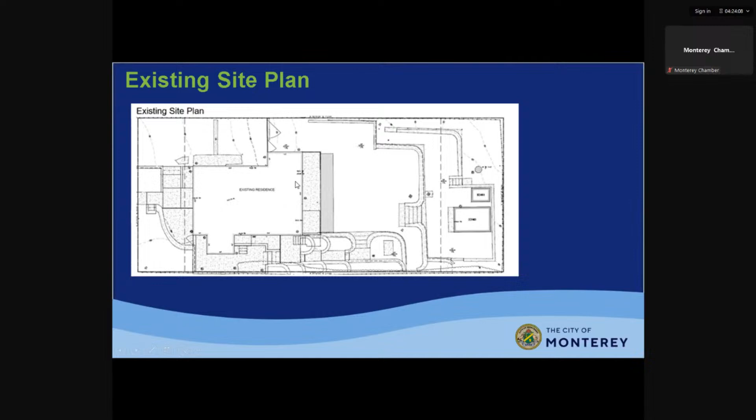The proposed project is a 534 square foot addition, a 267 square foot first floor addition, and a 267 square foot second floor addition. Replacement and relocation of a 289 square foot second story balcony and stairs. Expansion of the rooftop deck from 49 square feet to 200 square feet. A new chimney, new exterior finishes, and a new first and second story.

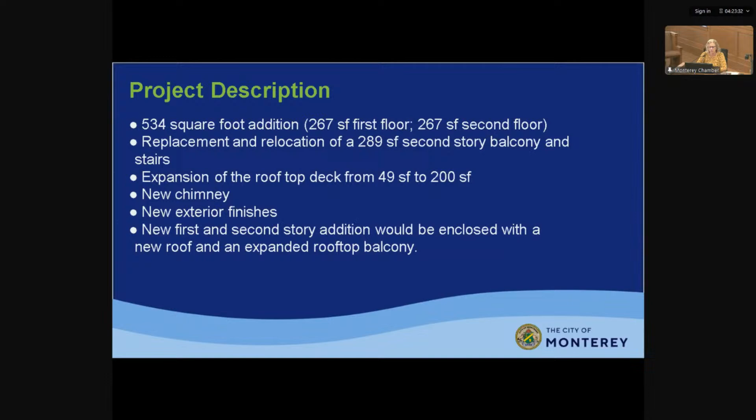The first and second story addition will be enclosed with a partial new roof, and the rest of it would be an expanded rooftop balcony. The project also includes the retroactive approval of horizontal siding.

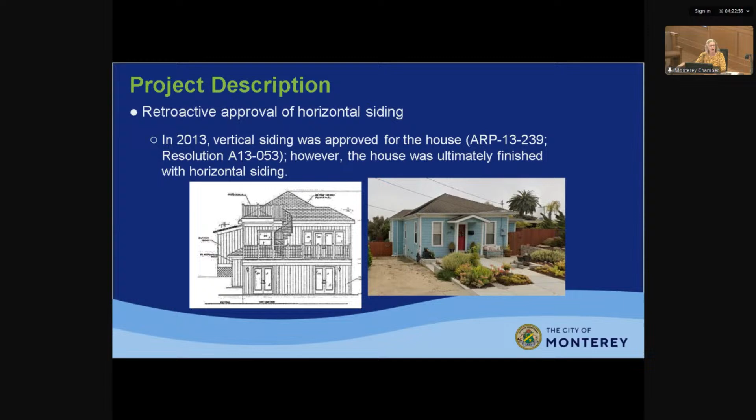So the last architectural review approval included vertical siding, and then I see that the residence has horizontal siding on it. When I visited the site, I couldn't track how that approval was made between the architectural review and how it was constructed with the horizontal siding. So this application includes that retroactive approval of the horizontal siding. The addition would be finished in horizontal siding.

Here's the proposed site plan showing the main and lower floor addition at the rear of the residence. So it'd be a first and second story addition, so there is no second story addition on top of an existing second story - it's all new. And then the expansion of the deck here that you see in the crosshatch, and stairs here.

And then there is an upper story deck, which I think it helps to see the rooftop or the roof plan, but it's going to be on top of this addition.

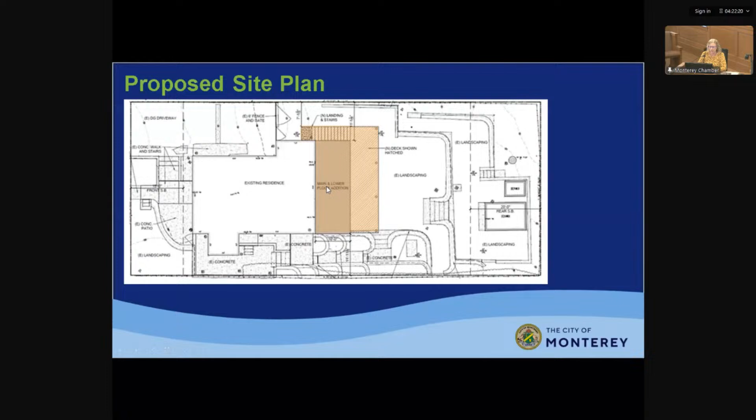So here is showing the rear elevation, the north elevation, existing and proposed. The rooftop deck is going to be expanded, as you can see on the proposed. The spiral staircase, the existing one, is just getting moved over from toward the center to the left side. New railing from wood to metal. I'll show you that as we move along.

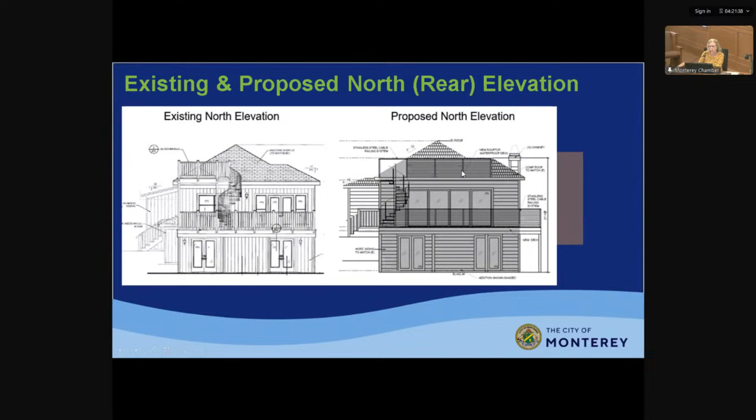The new addition will get a partial roof over here, and the rest of it will be the railing and the rooftop deck. There'll be a weatherproof finish on top.

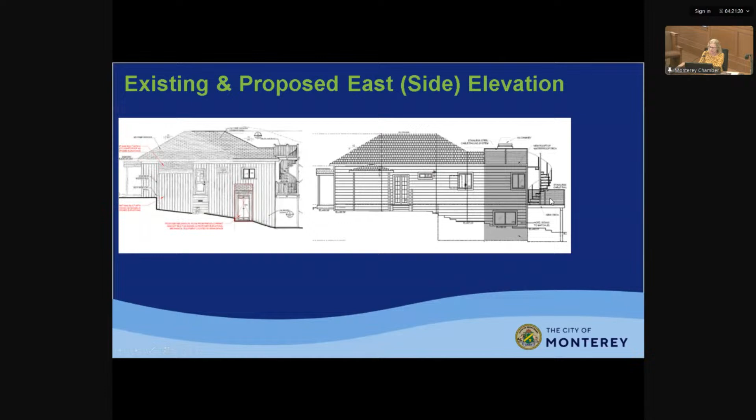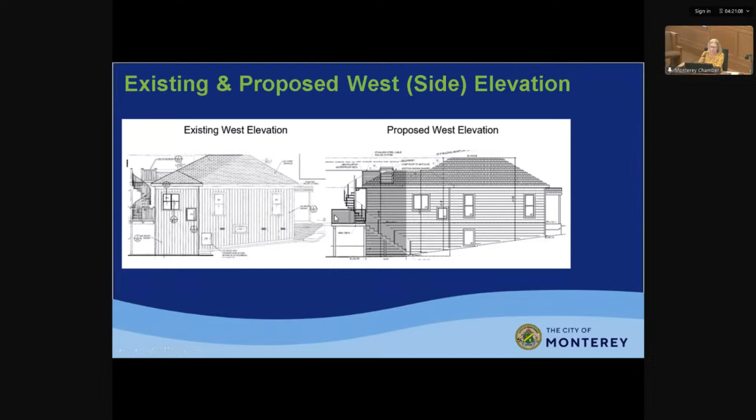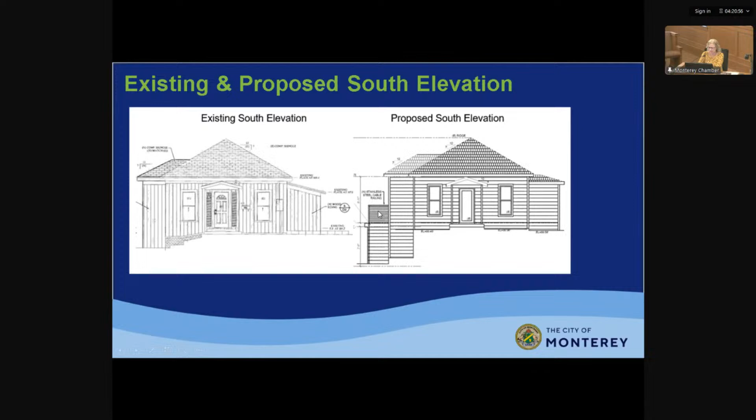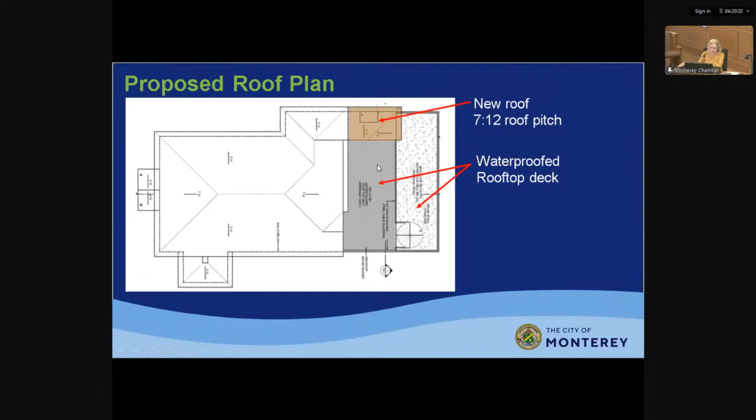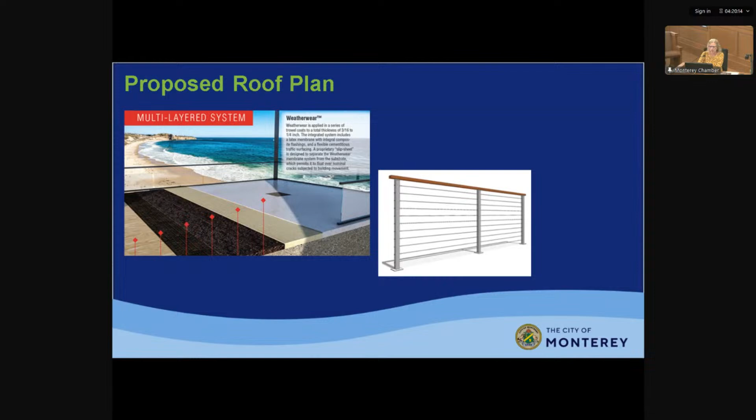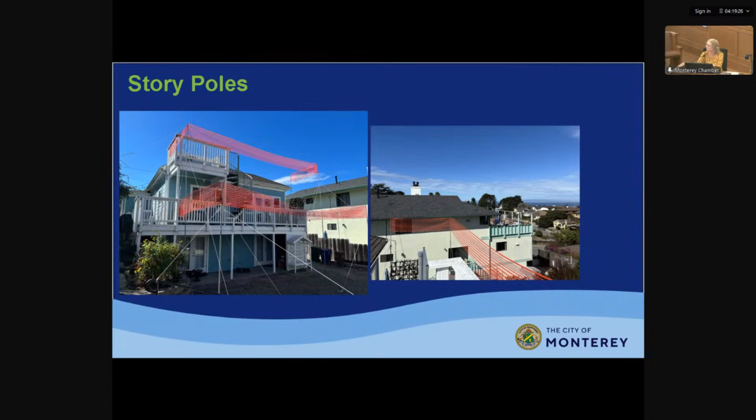The story poles were up 10 days, at least 10 days prior to the hearing, and more than that actually. Notices to neighbors within 100 feet. We didn't receive any letters, so I don't think there's any concerns about privacy here. I did stand on that rooftop deck, and I don't see that there would be any impacts to views.

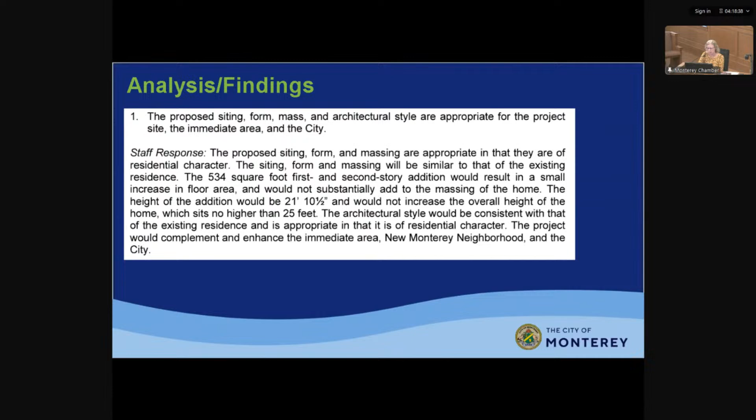So I'm going to go through the findings here. Finding 1: the proposed siting, form, mass, and architectural style are appropriate and of residential character. The siting, form and massing will be similar to that of the existing residence. The addition is somewhat small, 534 square feet, a first and second story addition, and would not substantially add to the massing of the home. The height of the addition would be approximately 21 feet, 10.5 inches, and would not increase the overall height of the home, which sits no higher than 25 feet. The architectural style would be consistent with that of the existing residence and would complement the neighborhood and surrounding area.

Finding 2: the proposed project will not unreasonably impair the views, privacy, or living environment currently enjoyed by properties in the vicinity. The addition would be located at the rear of the existing residence. So going through the west elevation, which faces the residence at 899 Pine Street, there's no new windows.

And there are windows located on the opposite side. Like I said, formerly a child care center, but now it might be a residence. But I didn't receive any letters of concern when we sent out the notices, and the story poles have been up. In addition to the rooftop deck, no one has brought forth any concerns of privacy.

And the bay views would not be impacted since the project would not involve an increase in height. Currently this house sits approximately 25 feet, and this would be just over 21 feet in height. So there should be no impact on bay views from adjacent properties or those sitting higher in elevation.

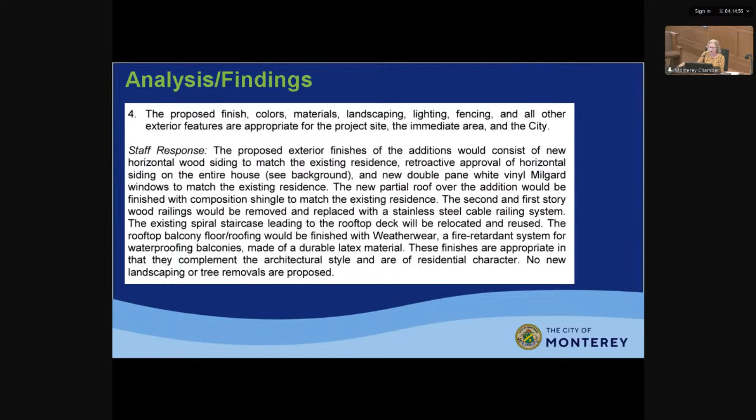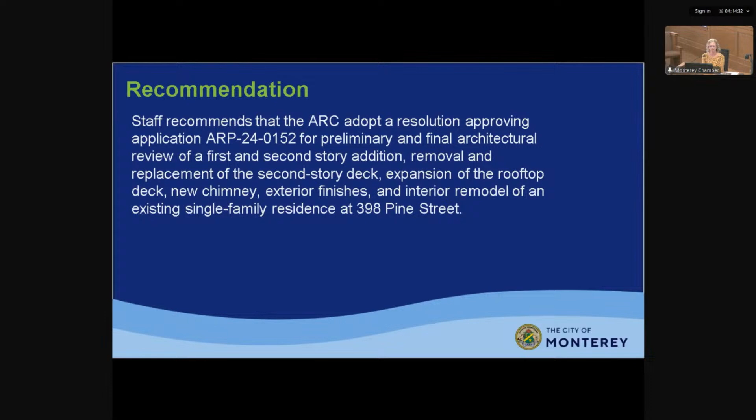Does anybody on the committee have any questions of staff? Seeing no questions, would the applicant like to make a presentation?

Good evening, members. My name is John Moore. I'm the applicant on the project. I think she did a great job, thank you for presenting the project. Our main goal in this was just to get them a little bit more room. They already had a rooftop deck, and then also maintain the privacy of the neighbors.

So that's why on the left side, facing the big three-story house, we did continue out the hip roof instead of just wrapping the cable railing around. That way, when people are sitting up top, they're not going to be looking at the neighbors, and the neighbors aren't going to be looking at them.

On the right side of the house, looking at it, there's probably a 12 or 14-foot big hedge where we do have one window in our kitchen area, and you can't even see the house on that side. So I think we've maintained the privacy from the neighbors in a complimentary way and got them a little more space that they desired. If you guys have any questions, I'm available.

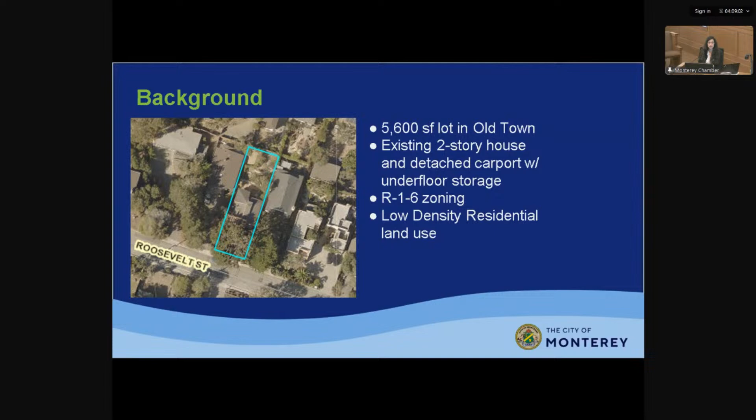The carport structure that is currently there is non-conforming in that it has a setback that is less than the required 20-foot front yard setback. The setback currently is 6 feet 5.5 inches, and the side setback required is 5 feet, but it's only 4 feet from the east side property line. And the height of accessory structures in the R1 district is 12 feet, but the carport's height is 16.9 feet.

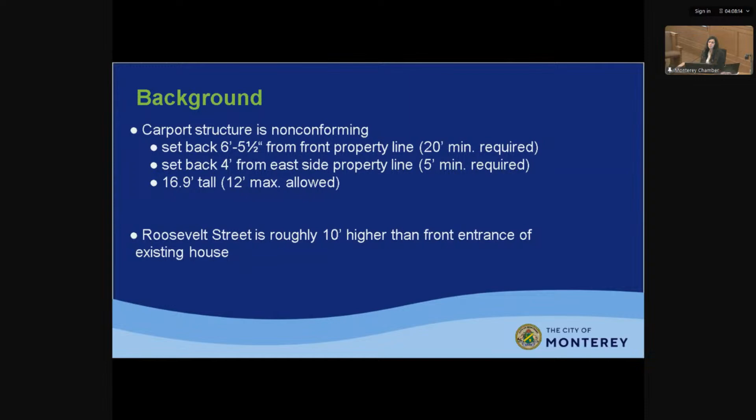I should point out that Roosevelt Street is roughly 10 feet higher than the front entrance of the existing house. If you look at this survey, the elevation on Roosevelt Street that was taken is at 258 feet above sea level, I assume. And then the elevation at the house, where these wood steps are the front of the house, is 248.29 feet. So that's a roughly 10-foot difference, and the site slopes considerably downhill toward the house.

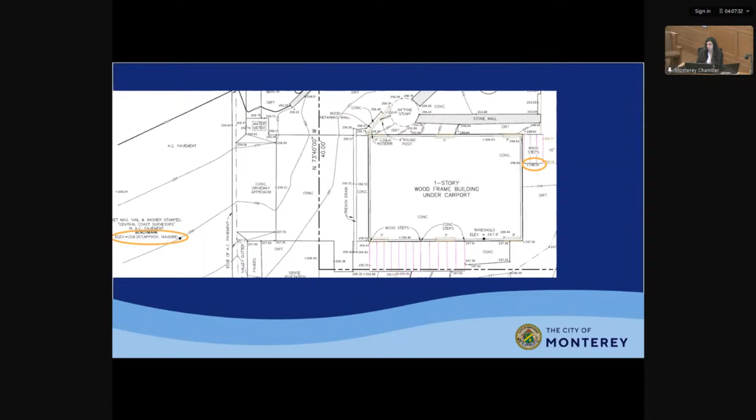The applicant applied for a variance to accommodate a new garage in the place of the carport. These are the requests that they made. The front setback would stay the same. The variance was approved for the front of the garage to be at the same distance as the current carport is to the front property line.

The east side setback existing condition is 4 feet. The requirement is 5, but the planning commission approved a 4-foot setback, the same as the existing carport. The building separation existing condition is that the carport is 11 feet, 5.5 inches away from the house. The requirement is 10 feet, but the planning commission approved a 7-foot, 4-inch building separation from the proposed garage to the existing house. The height existing condition is 16.9 feet. The requirement is 12, but the planning commission approved the variance of 23 feet, 11.5 inches as the maximum height for the proposed garage.

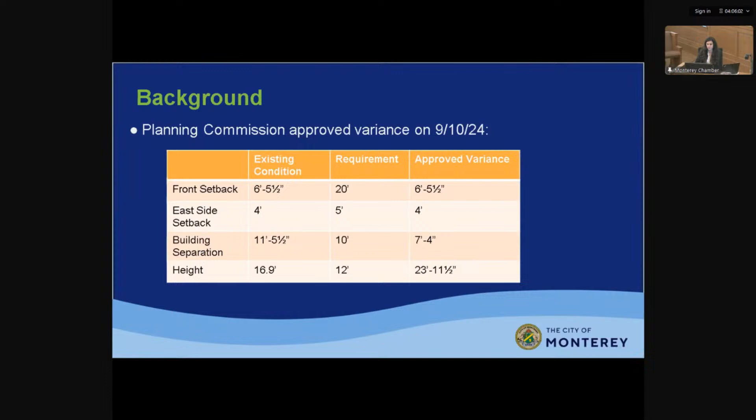This is to show the existing versus proposed site plan that the applicant submitted. You can see here on the left is the existing carport. The front setback is 6 feet, 5.5 inches. The separation to the house is 11 feet, 5.5 inches. And the 4-foot setback to the east side is right here.

The proposal is to keep that same front setback, keep the same side setback, get closer to the house, and to remove a tree. It's an 8-inch oak tree, which would be very close to the new 2-car garage.

This is the oak tree. It's growing out of, very close to an existing retaining wall, and it probably has its roots compromised already.

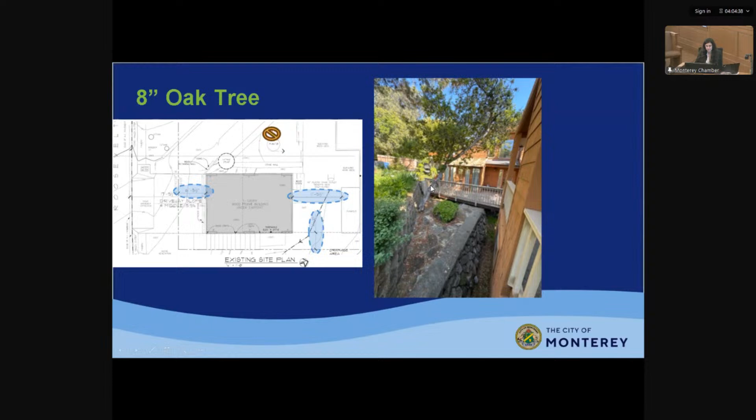And the other tree, let me show you. It's not shown here, but there was another tree that the applicant was proposing to remove, further west, so it's not shown here. But that tree was not a part of this development application. The city forester approved its removal because the tree was in declining health. It was an 18-inch pine tree, and the forester required a replacement tree, a 5-gallon replacement tree anywhere on site.

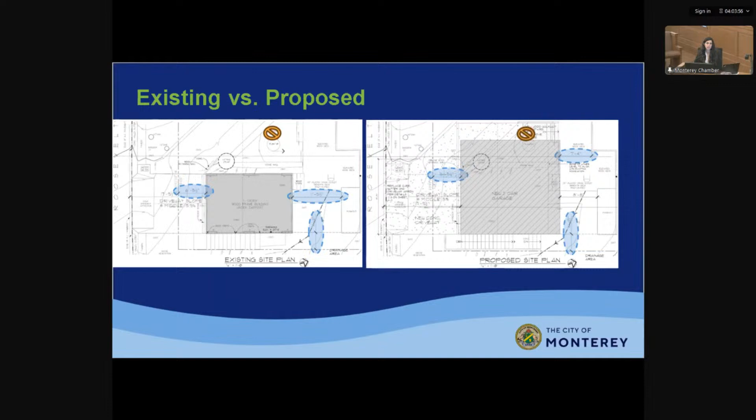This is the view east and west. This is existing, the carport again, and then the underfloor storage area. You can see the slope on the left would be Roosevelt Street, and it slopes down toward the house. On the west side, it slopes up to Roosevelt Street.

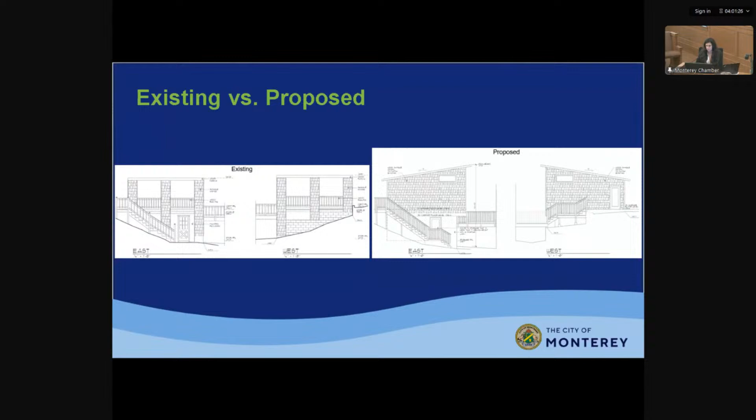The neighbor at 1030 Roosevelt Street, which is the east side neighbor, submitted a letter with concerns for the project. She submitted a letter at the Planning Commission hearing and a few days before today's meeting. The concern was the height of the back wall and the shed roof. She requested a different roof type to decrease the height.

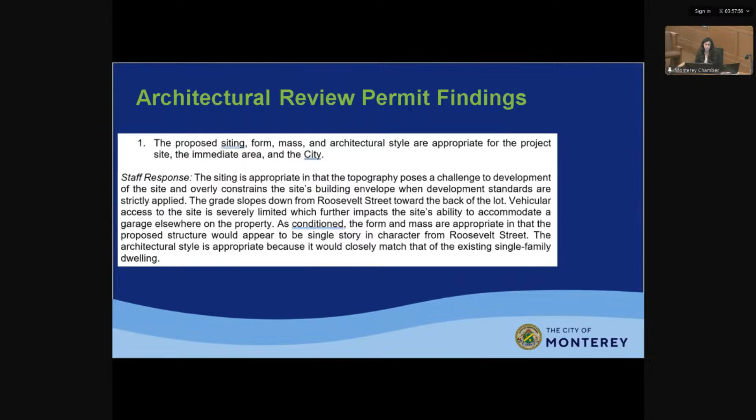As conditioned, the form and mass are appropriate, because there's a proposed condition in the resolution that would require the roof to be a different roof type to decrease that massing as seen from the 1030 Roosevelt neighbor side. As conditioned, the form and mass would be appropriate in that it would appear to be a single-story garage from Roosevelt Street. And the architectural style is appropriate because it would match that of the existing single-family dwelling.

The second finding is that the proposed project will not unreasonably impair the views, privacy, or living environment. The east side neighbor did express concern, and so as conditioned, the height of the garage would be reduced by proposing a different roof style, like a hip or a gable roof.

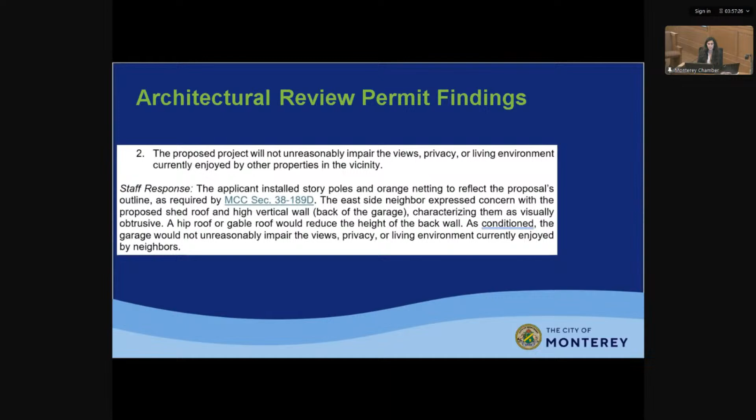The third finding is that the proposal is substantially consistent with the Monterey General Plan as well as all applicable land use documents. It's consistent with the general plan in that the 2-car garage and underfloor storage area would serve the existing home, and would be consistent with the general plan land use designation of a single-family dwelling. It's substantially consistent with the Old Town area plan in that it would look like a 1-story garage from Roosevelt Street. And the 2-car garage would bring the property closer to conformance with the zoning ordinance, which requires 2 off-street parking spaces.

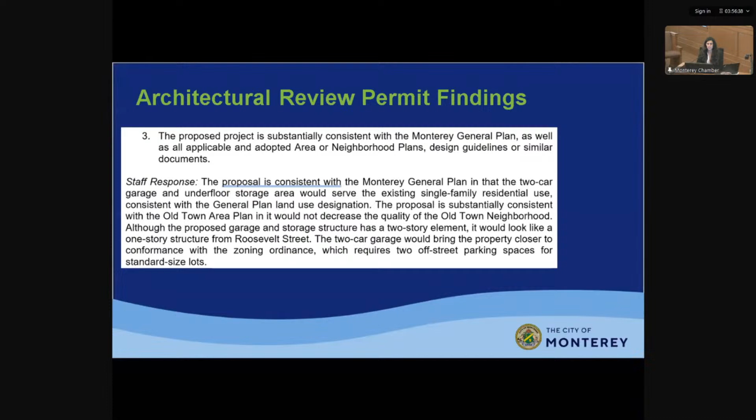The fourth finding is that the proposed finishes are compatible and appropriate with the site and city. The light brown wood shingle siding and light gray composition roof shingles would be appropriate in that they would match the existing home, and they are materials and colors that are used in general in single family construction.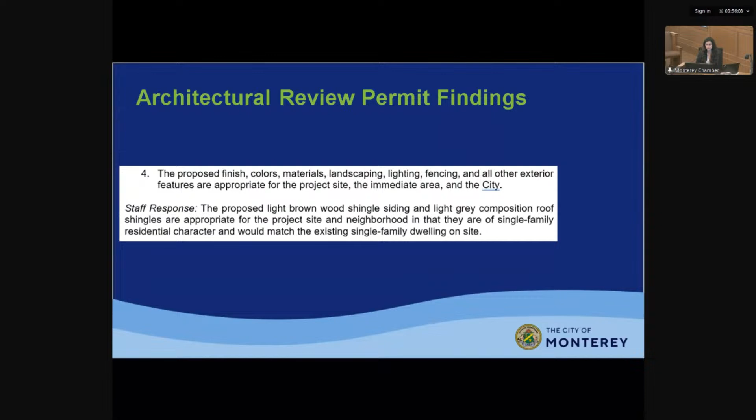The tree permit finding is the only finding that needs to be made to allow removal of a tree: that the tree prevents reasonable development of permitted uses. When making this finding, the ARC should consider existing development on similar sites and similar zoning districts having similar topographic and vegetation characteristics.

So, again, the topographic constraints of the site limit the siting choices of the garage. And so the removal of the 8-inch diameter oak tree would be warranted in order to allow development of a 2-car garage.

Which is a permitted use in the single family zone. Also, the applicant submitted an arborist report that says the oak tree develops with a suppressed lean within a raised bed and concrete covering the roots, so the tree cannot develop properly into its full potential. The arborist recommended removing the oak tree based on its condition and that it would be in the footprint of the garage.

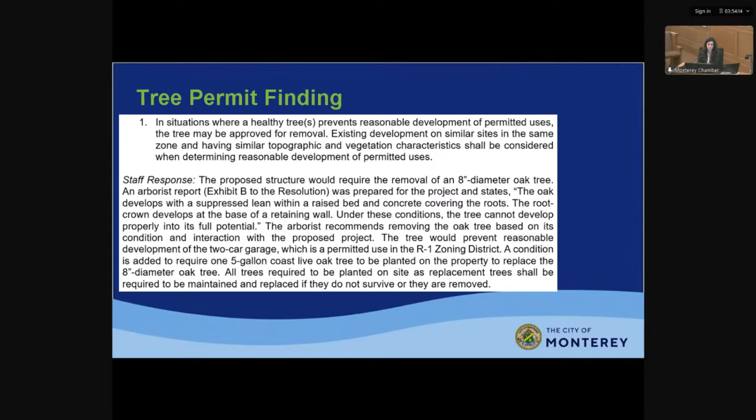A condition is proposed in the resolution to require 1 5-gallon coast live oak tree to be planted on the property to replace the oak tree. With that, staff recommends approval with the conditions. I'm available for questions, and the applicant is here as well.

Just have a quick question. I always get confused when something goes to the planning commission and comes back to us. But why is that again?

So the planning commission approved the variances - the setback, building separation and height variances - because those deviate from the zoning standards. And then the ARC's job is to approve development that is harmonious with its surroundings. So within the parameters that the planning commission set for you, your job is to look at the design and make sure that it meets those 4 findings that I went through.

So yeah, just to follow up on that, it's just a matter of purview. So the planning commission, as Fernando just stated, their purview is to review variances to the zoning ordinance, but they're limited in that purview to making the findings strictly for the variance findings and not wade into the design, as that's the purview of the ARC.

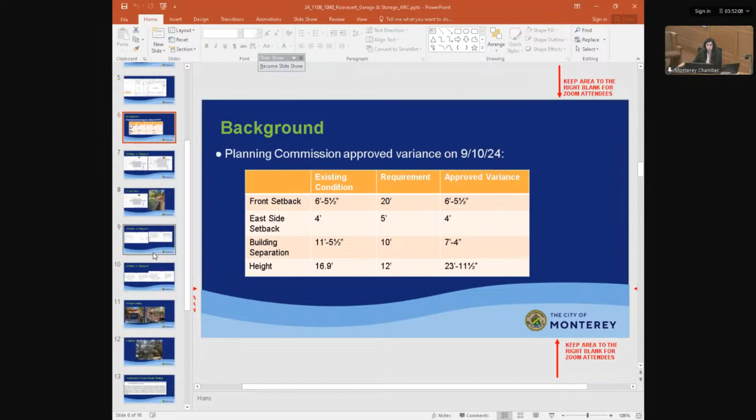It was - you had like the little paragraphs, the data table, later in the presentation. There. The form and mass are appropriate.

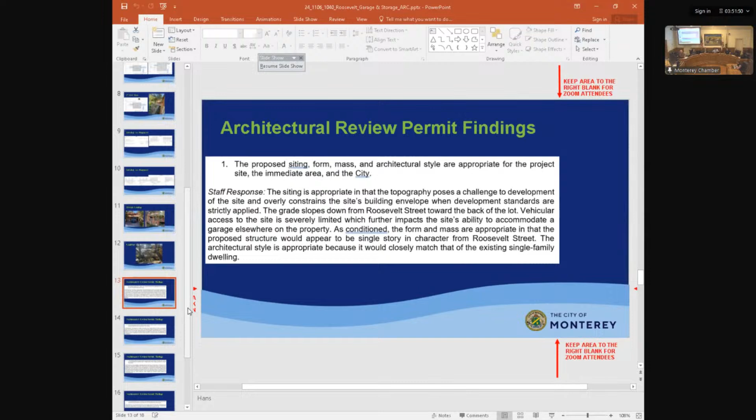Okay, so they're just excerpts of the findings prepared for this committee. Okay, they're not necessarily conditions of approval from the planning commission. Okay, so there were - okay. Well, one condition was to change it from shed style. Yeah, that's what I thought I heard, that there was a condition to change the roof.

That was recommended - that was a staff recommended condition because of the neighbor's concern. That's your recommendation to our deliberation. Okay, I got you, I got a little confused there.

And I see there's one tree replacement. Can you just explain that a little bit, since there's 2 trees being removed? Usually it's 1-to-1. Yes, so the city forester approved the removal of the 18-inch diameter pine tree, because the ARC and planning staff are not allowed to approve tree removals that are not related to development. Since that pine tree was not related to the development, it went through a separate approval process through the city forestry division, and the city forester determined that a 5-gallon replacement tree was needed for that pine tree.

Separate from that, today before you is a tree removal permit for the 8-inch oak tree, because it is in the footprint of the development. And the recommended condition is that the applicant plant a replacement tree for the oak tree. So there are actually 2 trees, but 1 is just not in our review today. Right, okay, got it. Thank you.